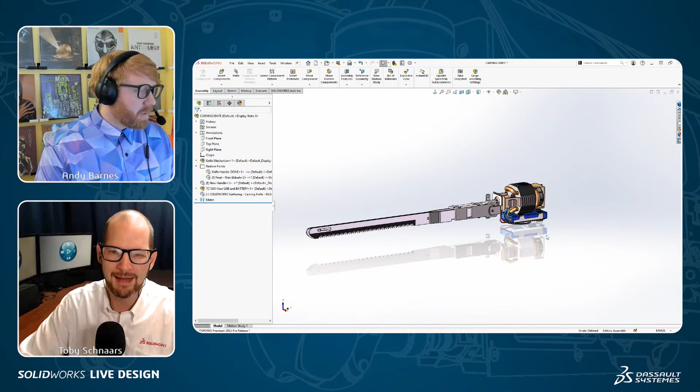So I think this is a perfect time to maybe talk a little bit about how much you love surfacing. And looks like part of this electric carving knife is missing. It is. Yeah. So if you've been watching SolidWorks stuff for a long time, you may remember this was the surfacing demo that we used to show a lot of the time, this handle right here. It's a pretty cool model, but it's kind of dated. And what we wanted to do is actually add a battery to this to have it be a wireless turkey carver. So you can plug it in, USB-C, charges the battery, and now I don't have to have an extension cord to get to my Thanksgiving dinner table.

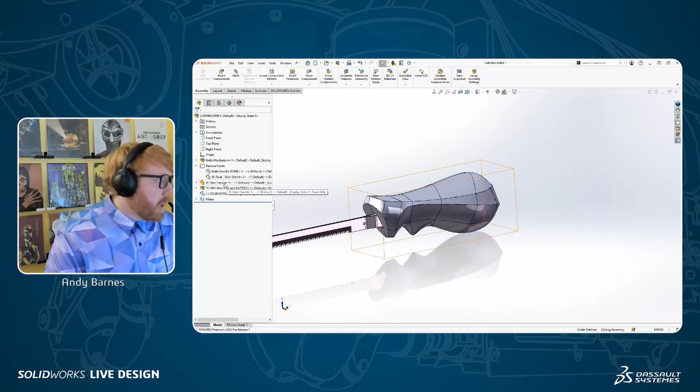So we actually created a new handle, and one of the handles that we created was actually just created right inside of xShape. You've probably seen xShape by now. You can do push, pull, subdivisional modeling, really cool, and then you can bring it back into SolidWorks. xShape is a tool that's available on the 3D Experience platform. It's a browser-based tool. There is a connector to SolidWorks, so you can pass stuff to the platform and bring it back into SolidWorks pretty quickly and easily without having to worry about, did I overwrite my file? There's some basic data management that can happen without you even having to think about it.

Okay, pretty great. So you got your tools in SolidWorks to create your mechanical design, and then if you're a surfacing expert, you could certainly design a handle like that using surfacing. But a different tool would be to almost just have a block of clay that you can push and pull. That's subdivisional modeling, right? Absolutely. Kind of push and pull nodes, push and pull surfaces, and then you can end up with a design like that. If you're pretty good with xShape, how long do you think it would take you to do a handle like that?

I think now that I know exactly how to push and pull everything, you can make that thing in like 10-15 minutes. Oh, wow. But right off the cuff, not having anything, I think it took like an hour or two, trying to just play around. But thinking about how long that would take me to do, I'm a pretty solid surfacing user in SolidWorks. I'd say that would probably take me a day. Let's say it would take me an 8-hour day to really push and pull and get it all to exactly the right shape.

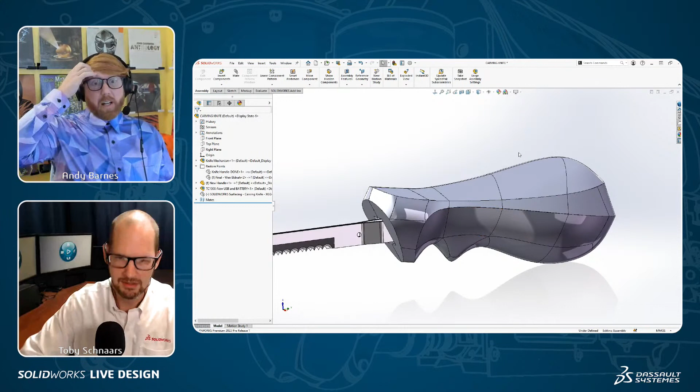And you're saying you're able to bang out iterations. But anyways, we're not here to talk about xShape. That's all good. I did want to point out that if you still want to use traditional surface modeling, you absolutely can. You can use your SolidWorks models, whatever they be, a swoopy surface model or a blocky thing, to put patterns on inside of 3D Pattern Shape Creator, which we'll get into in just a minute, and then bring them back down into SolidWorks.

Is that what you're showing here? This is one you did in SolidWorks? Yep. This is regular old surface modeling, right? Here's a bunch of surfacing features in there, yada yada. I see in the tree you've got solid body 1, so when you were finished, you turned this into a solid. We're ready to go. Exactly. It's a solid body at this point.

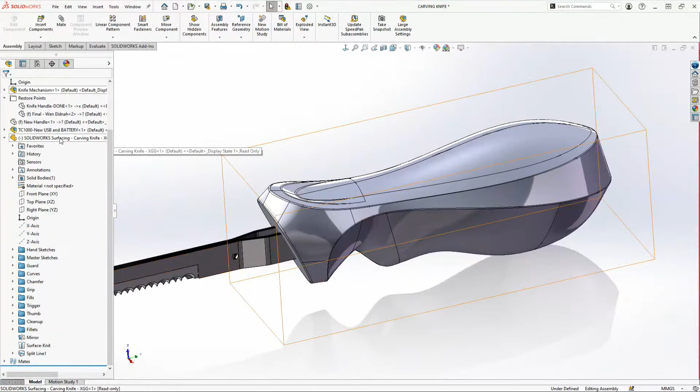So if I go in and look at this part, the only thing I've done to it after I've surfaced it is I've added this split line to the top. So I've cordoned off this area, and this is the area that I want to add a pattern to inside of 3D Pattern Shape Creator. There's a couple different ways to cordon off the areas you want to pattern. You can identify all the areas right inside of SolidWorks, no problem. But there's some other ways to do it too.

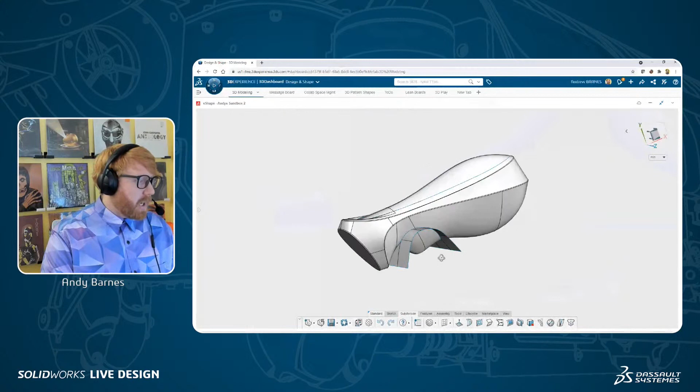So what I'm going to do is hop into the 3DEXPERIENCE platform. I am in a browser right now. I happen to be using Chrome, but you could use any browser. I'm going to open up this part that I've brought into the 3DEXPERIENCE platform from SolidWorks. This is the geometry that came from SolidWorks, and all I've done to it is add some offset surfaces.

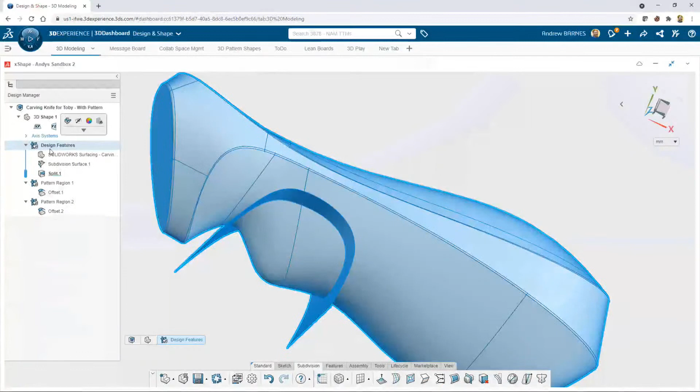If I go back to this geometrical set here, this is actually a SubD body itself. And by the way, I'm in xShape right now. You could use xShape to push and pull around whatever area I want to put a pattern on. Basically that's doing a split line, and now I have just an offset at 0 or a copy surface to identify the areas that I want to pattern.

Make sense? Yep, absolutely. So you're going to put some kind of a grip on there, like a knurl, whatever pattern. Right. So now I'm going to drag it over into xGenerative Design, which is another app on the 3DEXPERIENCE platform. Both of these are completely browser-based apps. So I will hide this area right here, and then start creating a pattern on one of these two surfaces.

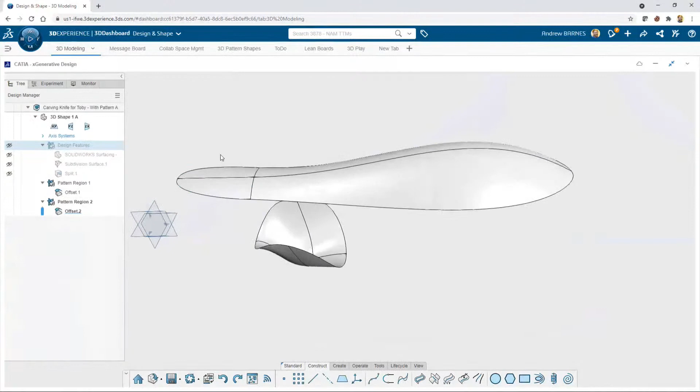The first thing I might want to do is create an intersect with this surface. I'll go to my intersection tool, select this plane, and also select that surface. Now I've got this curve that intersects all of that. Yep, with you so far. Now I could go find my divide curve by length tool, but what I'm actually going to do is pop open the graph. I like working with the graph.

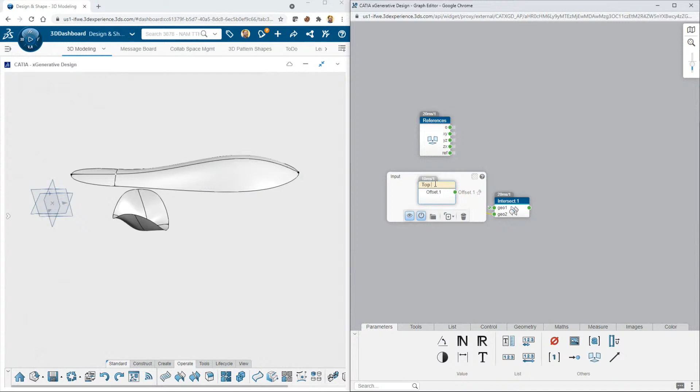This is where things start to look a little bit different than modeling with SolidWorks. Now I have these two nodes that got created. This is an input node, and the first thing I'm going to do is rename it. We'll call it top surface. And there we go, and now that is intersecting with that plane.

I've seen you work this magic before. Just for the sake of our audience members, would it be possible for you to apply a pattern right now so they can see what the end result looks like before you go through and build it up? Because I think that might help them track what you're doing here.

No. Okay. I don't want to do that. All right. Fair enough. I mean, we are on a limited time constraint, so I totally get it. Yeah. I want to build it piece by piece. Just a simple one, just to get an idea of how this is being built, so it doesn't just look like magic, right? Because this isn't just out of the box, like, oh, well, I have this type of pattern and I put a button on it and it just fills up the area, right? There's more to it than that, right?

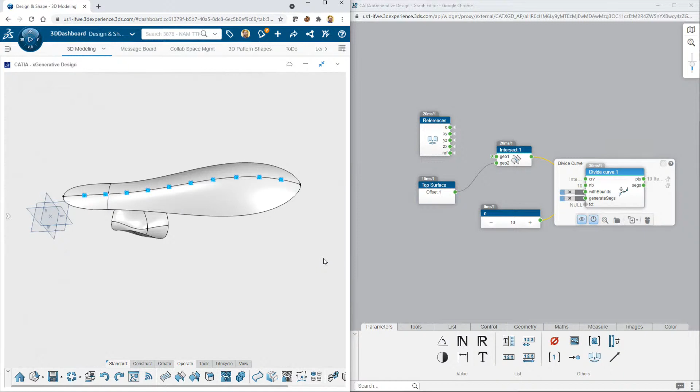So what I want to do is I want to take this curve and divide it into a bunch of points, right? Okay. So I'm going to go divide curve, and now I'm going to add a number to that, and I'm going to say I want to divide the curve by 10 points. Now what I've done is I've taken that curve and I've divided it up equally, right? And we can do this with the segment tool inside of SolidWorks, right? I can segment a line and get a bunch of points along a line. So now I've got that node.

Now what I can do is add a plane, and I'm going to say plane offset point. And I'm going to say at every point, I want a plane that is perpendicular to, and I'm looking over in my graphics area, and I can see those highlight, right? So I know that I want the YZ plane. And now I've got a plane that is parallel to that at every single point. So now I can say I want to divide that one, and I'm sorry. Now I can intersect, right? And I'll just leave that there because I can reuse that in just a minute.

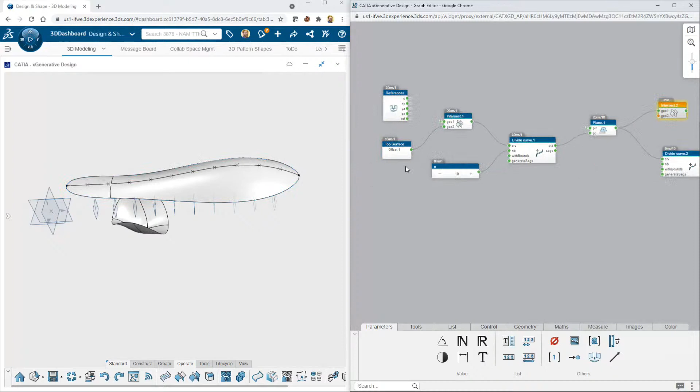And I know I'm going to need to reference this top surface a bunch of times, right? So what I can do is just say I want that to be one of my favorites. And now when I go to favorites, I can find top surface, right? And now rather than dividing this, which doesn't make any sense, I can divide this. So now I've got essentially like a grid of points along there, right? But the problem is I have a number here, like 10, and the distance between these points is much lower than the distance between those points. And what I want to get is an evenly spaced amount.

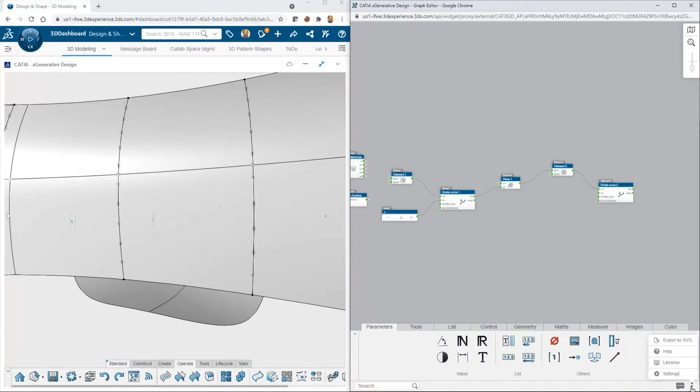So what I could do is set up this thing called a Voronoi and do this weird stuff. But I think what is cooler is, I have to do this stuff all the time, so what I did is I actually created what we call a user operator and saved it inside of one of my libraries, right? So I'm going to open up the patterns library. And now down here in my geometry tab, I have a bunch of different patterns that I've created. And one of them is neighbor distance. So I'm going to pull that out, and all I need to do is give that points. And then what it does is it gives me the distance to the closest neighbor, okay?

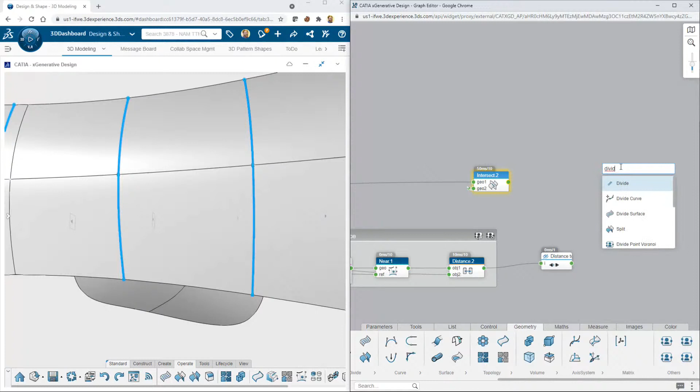And I can always expand that out, and I can see, well, actually, it's all of this stuff in there, but I don't even need to see it, right? I'm just going to reuse all that, so I'll just throw it in there, and now I got the distance to the closest neighbor. Now, the reason that I wanted that is so I could drive a different type of node. I'm going to say divide curve by length. So I've got a bunch of these curves, but I'm going to divide them up by this distance. And this distance to the nearest spacing is going to be approximately the distance between these.

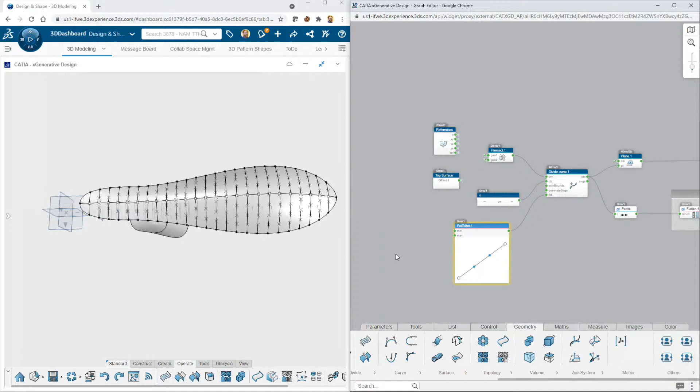So now if I crank this up to, let's say 25, now I've got, it's not exact, but about the same distance between this line and this line and this line, right? So now they're sort of evenly spaced. Now what I could also do is turn this into a function, and we'll add the function editor. Right now, what we have here is a linear relationship: this one is just as far from this one, is just as far from this one. But if I add a function editor, I can actually control the spacing of this with a graph.

So now they're kind of bunched up over at this end, right? Oh, wow. Yeah. So now I can kind of say, okay, down here there's a bunch more, and over here there's less, right? So now I've got a whole bunch of points, right?

And in SolidWorks, half the time when we're trying to create a crazy pattern, it's like, okay, I could create the seed all day, but then how do I tell it all of these other places that I want it to end up, right? And I don't have a ton of control over that, and it might not update necessarily well.

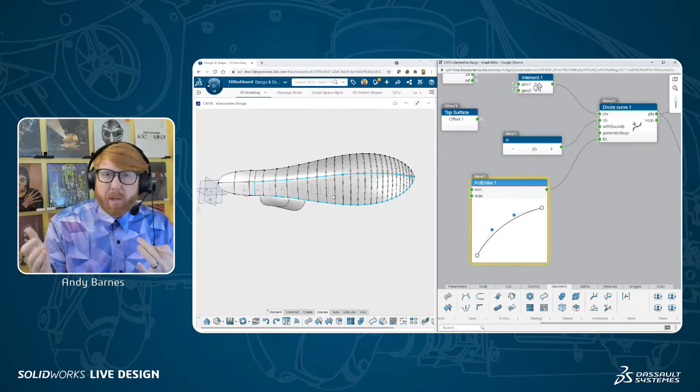You can see in here, we can start playing around with this and get wildly different, kind of gradient swooping differences between instances of the pattern, right? And I can do it very, very quickly and easily. Right? Yeah, that's what I was thinking.

There's been times in the past where I've tried to do something like this on a curved surface, and so I'll end up creating the points to use a point-driven pattern, but then the distance between them, how do you do it? A lot of times I would do a 3D sketch and make a bunch of lines and then make them all equal length, and that would give me kind of equal spacing, but it's very time consuming. You were able just to drop these points in here live for us in less than 10 minutes.

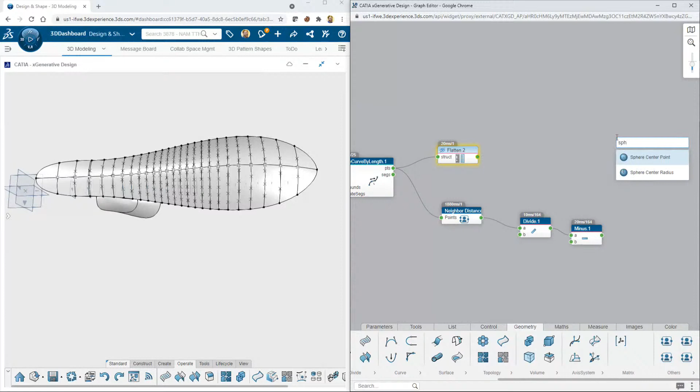Absolutely. And I could even use this for another set right here. I could say divide this by 2, and then I'm going to subtract 0.1 millimeters from it. And now I'm going to use these to create a sphere, center point radius. So now at the center point of all of these, I have a radius that's being driven by the distance to the next one, right? And in no time at all.

And essentially the radius becomes the distance to the closest neighbor divided by 2, subtract 0.1, and now I know that there's a minimum distance to the nearest neighbor of 0.1 millimeters. Right. And then I could use that for a split command, a fill, all that good stuff, right?

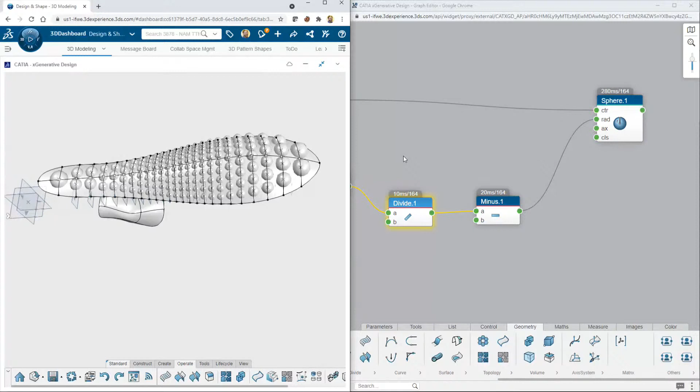So here's an example of how quickly and easily you can create something that is able to update really easily, and the amount of changes that you would have to make inside of SolidWorks to go from that to that, right? It's just mind-boggling. You wouldn't be able to do it, right? Yeah. Wow.

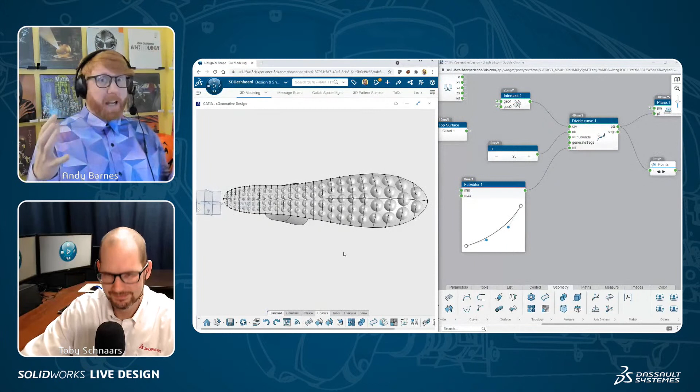And I know there might be some people on the call that are like, okay, that's cool and everything, and it's great that you got a little graph there, but I could do that using equations, right? I could set up some sort of series of equations. I've been on SolidWorks tech support, and I am constantly amazed at some of the stuff that our end users are able to create, just mind-boggling stuff. I had no idea you could go this far. You're way past what I thought the limit was, right?

So I'm sure that there are some users on the channel right now that are like, I could do this with equations. So I wanted to show you something that I don't think you could do with equations. Okay? So I'm going to do another input node, right? And this is how we get geometric stuff into the graph that was created somewhere other than xGenerative Design, right? So in this case, the input is referencing that surface right there. Okay, yeah.

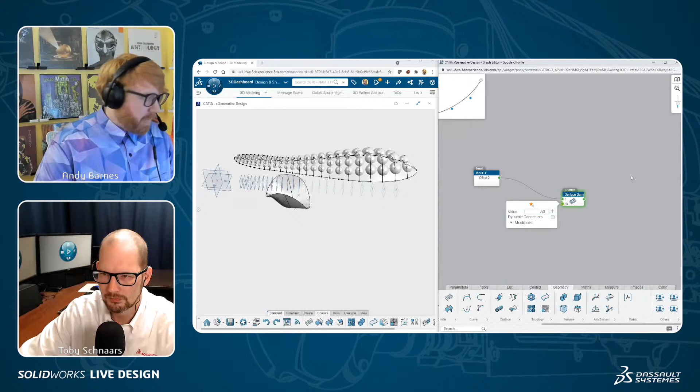Got it. So now I'm going to say surface sampling, and I'm going to just crank this number up to like 50, right? And now it just samples the surface and puts a bunch of points right on the surface, right? Okay. And they're kind of randomly placed, sort of even-ishly placed, right?

And then from that I can create this Voronoi, which we've actually already used, but we haven't really talked about what it does exactly. So it's this special kind of shape in math; if you Google Voronoi and look at the Wikipedia, you'll start to grasp what's going on with it.

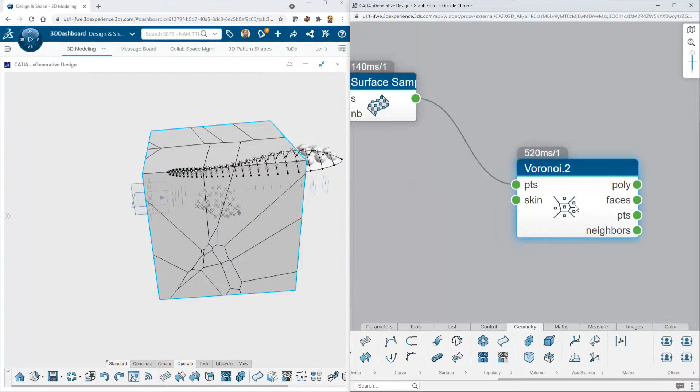But it's basically creating like this, right? Every point is creating not always a hexagon, but a lot of times a hexagonal shape, depending upon where the neighbors are, the neighboring points. So I can actually use this, and I'm going to add a skin here, and then I'm going to say I want to generate faces with that, and then I'm going to hide this, and we can kind of see what has been created here.

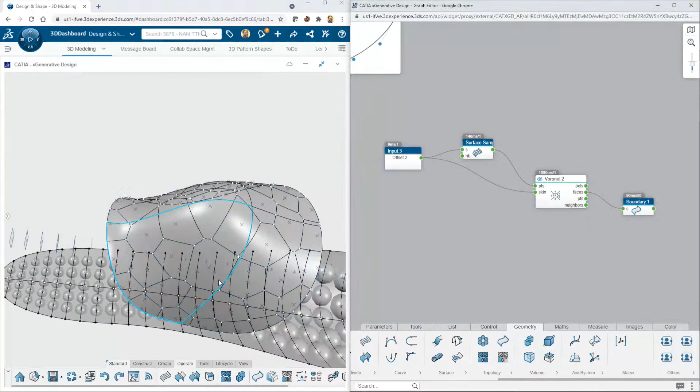If I do a boundary, right? Ooh. I have this kind of crazy hexagonal pattern that was put on there, just by saying drop a bunch of points and add a bunch of hexagons. I mean, they're not all hexagons, but you get the point, right? Like that. If somebody showed me that and said I want to create that in SolidWorks, I'd be like, I don't know how you're gonna do that, right? You could be like, okay, I could get something close to it.

And you start chugging away, but then it's like, okay, actually, I want to make it tighter. I want 100 of them, right? Now, there you go, boom. You got 100 points. Like, wow. You just can't. There's no way that you can do that with SolidWorks, right? So that's what I think really is the power of this. Well, what do you do with that Voronoi now? I mean, it's just split surfaces, right?

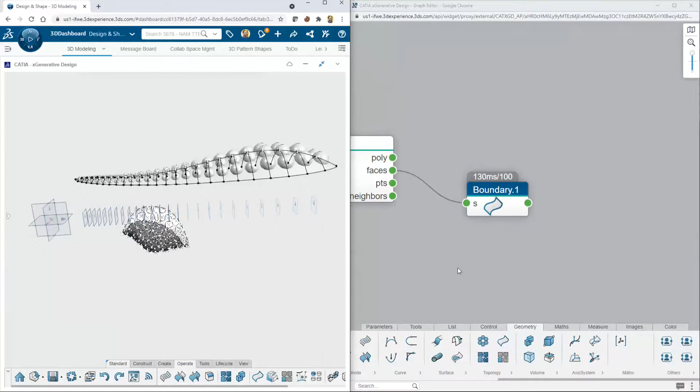Yeah. So what I could do is, and this is a bit more time consuming, so I don't think I'll show it, I'm going to start dropping in some pre-created patterns, like you were mentioning earlier. I think now we have a good understanding of how you might build this stuff. So I just wanted to make sure that it didn't look like magic. Yeah, it's interesting. I mean, it's very different from what we're used to in SolidWorks with that flow chart over on the right.

It almost reminds me of a graphical programming interface, like there's elements of it that I've seen in Blender, or it reminds me when my kids were a little bit younger, we would go through and do programming in Lego using the NXT models. Exactly. And it's like that kind of programmable, logical.

What did you call it before? Computational? Computational design is the industry term for this, and I'm sure that there's a bunch of other terms. It's just the one that I've been told. So you select your input, and then from your input you start establishing all the rules that are going to be applied to that input to generate geometry.

Yes. And some of the really nice things is I can say I want to put all of this in a box, and then I could say I want to organize it all, and it'll automatically space everything out properly for me. It's really nice and organizational. And then I can do things like hide the entirety of it. And then I could even say, okay, I want to create a user operator from this, and that's how I could take that chunk and say I want to use this over and over again, right?

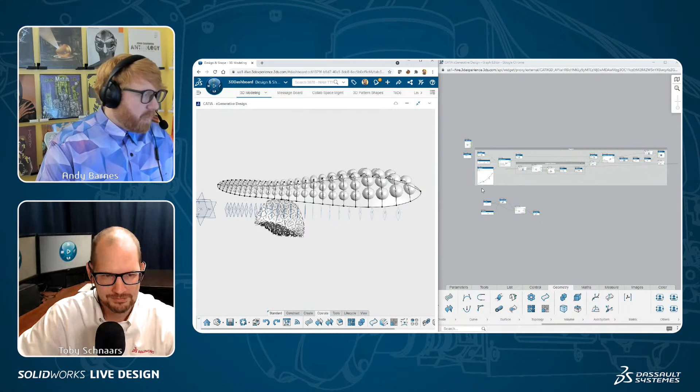Right. Cool. Yeah, if your company gets almost like a signature texture, then you might want to start using that over and over again on different products. And how do you do that? Right. Cool. So I think it would be good to show some of the other types of patterns that I can get on here really quickly. So I'm going to go ahead and just ditch all of those real quick. I shouldn't have got rid of my inputs, but that's okay.

One of the other things that you can do is, if you want to share this with somebody, you can literally just take that whole graph and share it out as a text file, like a TXT. You can copy paste it right inside of an email. I wouldn't suggest it, but you totally can. It works. It does look like a ton of gibberish, but you can do it.

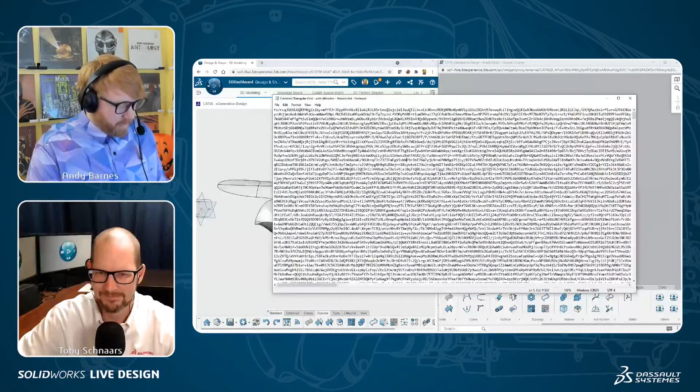So I actually have a whole bunch of stuff. For instance, I think this is pretty cool: centered triangular grid with attractor. So I'm actually just gonna open this up. You can see it looks like gibberish, right? Control A, Control C, and then I will just click inside of my graph area, and now it's gonna paste that entire graph inside of there.

And then I just need some inputs. Right, so I just need to give it the main surface and the triangle size. So I'll say that's my main surface, and now it's going to build this. It's creating like a bounding box. It's grabbing the surface area of the bounding box. It's figuring out what the longest portion of it is and using that to be like the direction that it creates this triangular grid in.

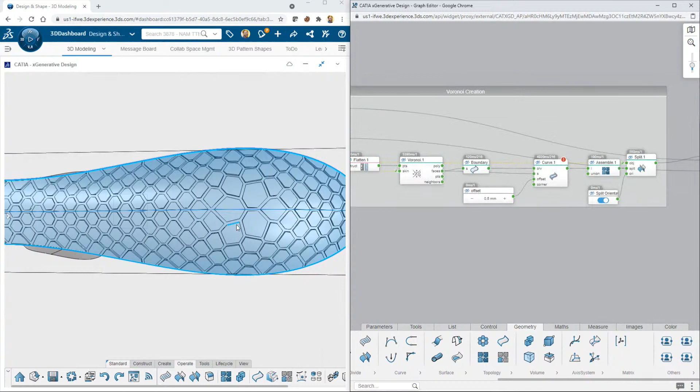It's doing a bunch of math to center the triangular grid on the center point, right? And now finally it's actually creating this attractor point, and then from that attractor point kind of moving the triangular grid, bulging it out in a certain direction, and then I'm offsetting all of the faces, right? There's basically a face offset, a curve offset on every single face, and then I am, not extruding, but thickening that surface, right? Normal to the other surface, up by a certain amount. Pretty wild stuff.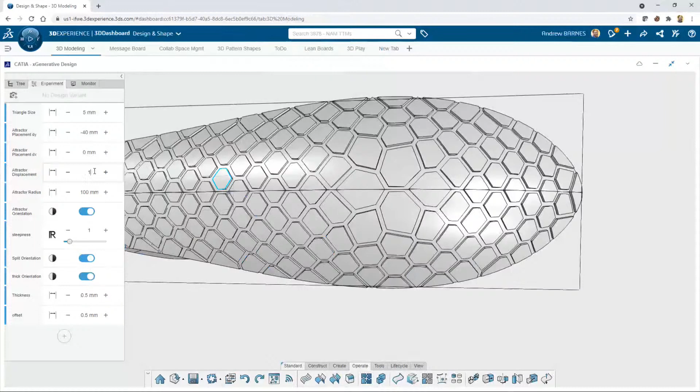So now I can even put controllers on here, right? So for instance, maybe there's somebody who doesn't know how to set all this up, but they want to be able to play around with it. Well, I could say the attractor displacement is larger and the attractor radius is smaller, and actually get this shape to update. So I'll say the attractor displacement is 7. So at its largest point, it's going to displace the point by 7 millimeters, and at its smallest point, by like 0.1 or 0.01 millimeters. And that radius is how far away that change happens.

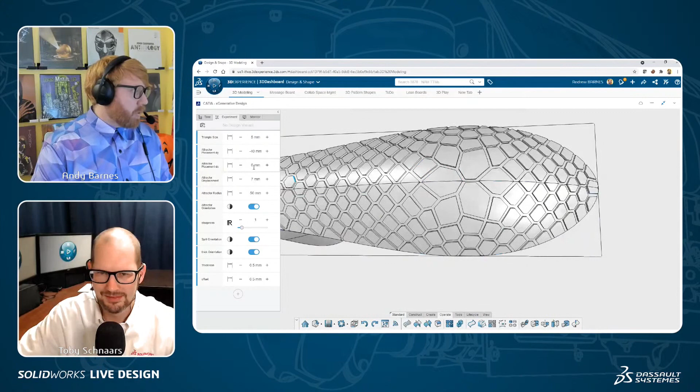So now I've made it small. I've made it push more, but for a smaller area, right? So this is actually a different output than I would have gotten before. And this attractor displacement in the Y direction shows where this attractor would be. Well, what if I displace it by 10 millimeters in the X direction? Now I'm going to get an attractor that's offset, it's going to go this way, whatever positive X is.

Oh, wow. Okay, I see what you're saying. It's no longer necessarily going to be symmetric. Right. It's going to be offset. Wow. Yeah, this is amazing. I mean, the chat's going crazy. PC says, beautiful, man. Oh, wow. Yeah, look at that result.

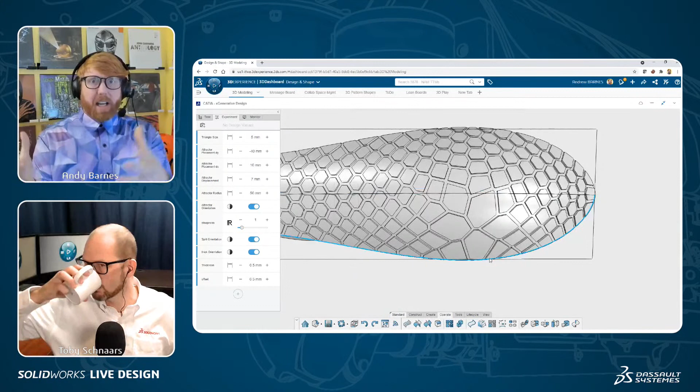So the point of showing this part is that maybe you're not the person who's the final decider for what this pattern is going to look like, right? But you could build this and then somebody else could literally just play around with it. Like I can even flip the split orientation. Right now I'm extruding all of the inners, but if I flip it, then I can extrude all the outers. I must have an error somewhere, but that's okay.

And you will get errors, and the other great thing about errors is if I have 200 instances of something and I'm trying to do a cut or a combine, SolidWorks is going to say it errored. There's a general geometry problem. It's like, what does that mean? And I have to start going, okay, where are all the places where it may have failed? The great thing here is you literally get a list output, and you'll have one that errors out. You can find those errors and go look at a specific point.

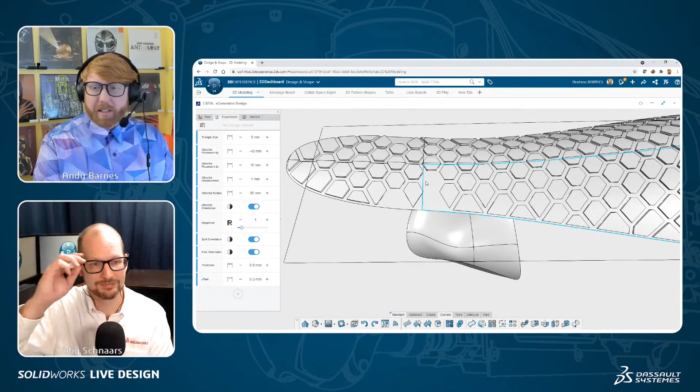And a lot of the stuff that ends up failing on this one is actually because Jordan Tadich created this surfacing model. So I'll blame him. But this face should be curvature continuous right here, and it's not. So because of that, when you try to do an offset line at a diagonal across this, it's not tangent anymore, and then things start failing.

So yeah, really, if that was SolidWorks, the whole thing would just fail. You just wouldn't have a pattern. You wouldn't know that. Right. There would be no pattern. Awesome. Yeah, because even let's just say you were like, look, I don't know how to fix it in all these rules. These rules are confusing.

You could put that back into SolidWorks, and then you could just fix those instances in SolidWorks or do whatever you do. You can keep on moving. And a lot of times in here we go like, okay, I know the edge cases are going to error out, and that's fine. They're just the edge cases, and that's not even important to me. And you can just move along with a thing that has an error in it, right? And it's pretty sweet for that reason.

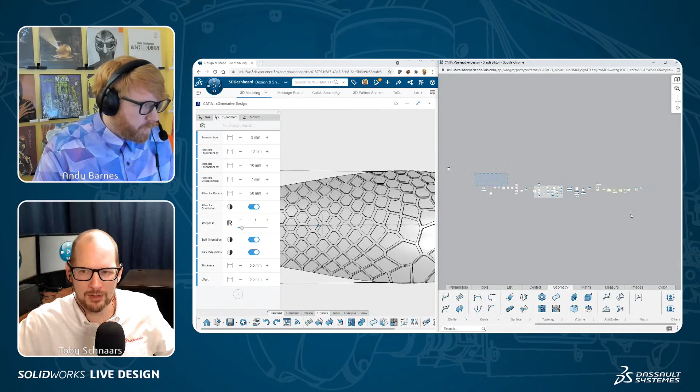So let me show you another one here. And it's just so amazing because at your company you could just have this library, like these are the different textures we use on different products, and whoever the wizard is, Andrew Barnes, you're the wizard. I'm the wizard. You go in and set up this library and then make everybody else at the company look great, because all they would need to do is grab lumpy diamond gradients and just add that back onto the model. It might be my favorite name for something that I've ever come up with.

Let's see. It also makes me think of lumpy gravy, which I like. Okay. Yeah. This is a Zappa reference. Yeah. Anyways, it's like, oh, he likes to eat lumpy gravy. That's kind of weird.

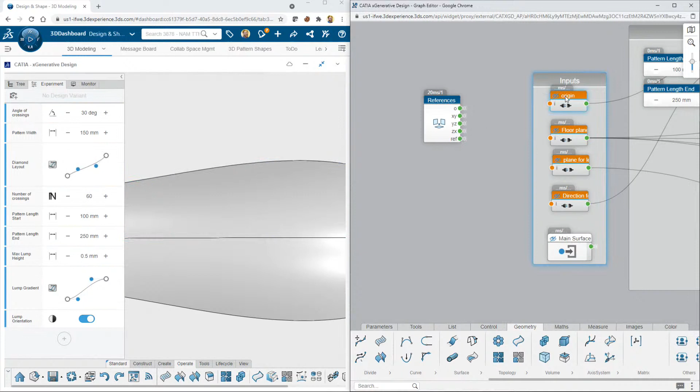So you notice I have a whole bunch of different experiment controllers now. And basically I have a bunch of different inputs, right? This one's the origin. And then it's like, okay, what's your floor plane? My floor plane is going to be the ZX plane, plane for lengthwise intersection. That's going to be my XY plane. And then the direction for the line is going to be this one. And so I know it is, wait, no, I don't know what it is. It's my YZ plane. And then I need to input my main surface, which is this one.

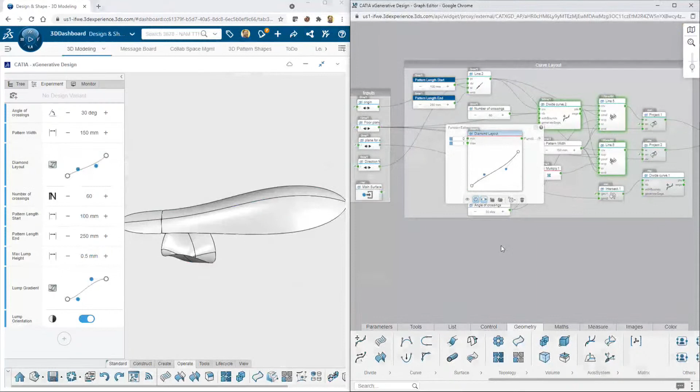And now it should build. Is it building though? Sometimes I just need to suppress and unsuppress something. Activate and deactivate something, which is actually how you get a rebuild essentially. Okay. Yeah, it's interesting. We're seeing the progress bar up there, but I'm not seeing any errors later in the logic tree on this one. Right. Maybe this didn't. Oh, that's all it did. It didn't actually take the input. I thought it did, but it didn't. That's all it was. Yep. Okay. There we go. That's what we're expecting to see.

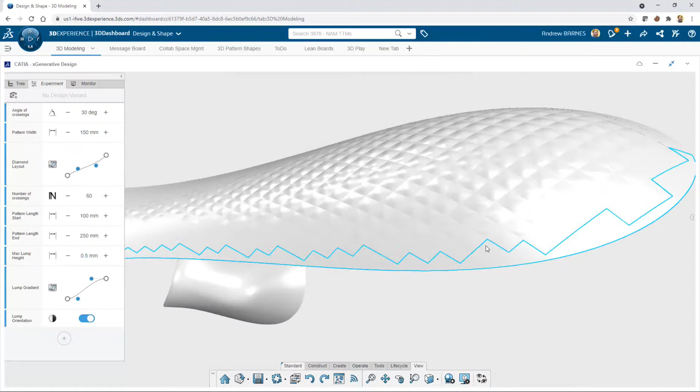There's a point in the middle of all these diamonds, and I'm basically doing a fill surface, a fill where the boundary is the diamond, and then there's a point, right? And closer to the edge, that point is basically on the surface, so it's like a flat piece. And then the farther away it gets, the closer it's going to be to my maximum lump height. So my max lump height right here is 0.5.

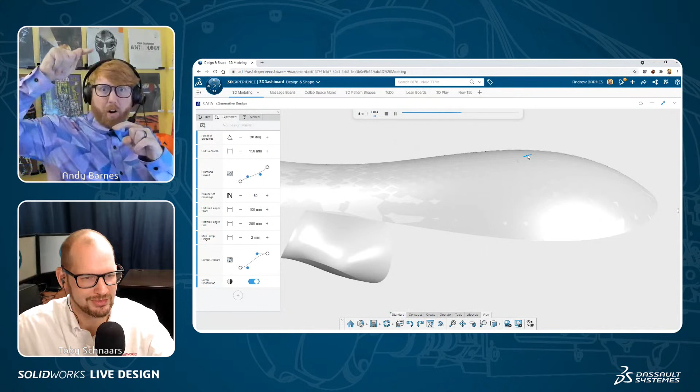What happens if I try and bump that up to 2 millimeters? And now it'll, if it builds, right? Sometimes this one will fail because if you get that point far enough away, just like you would in SolidWorks, then your fill surface fails. So it can be a gamble, but when it works, it's kind of fun. Yeah, woo! Porcupine grip, right?

Now it's just saying the biggest one is going to be 2 and the lowest one is 0, and then this actually plays with the gradient itself. So right now it's kind of pulled out, it's going towards 0, right? But if I did this, now it's going to be much sharper on this end, and it won't actually get down to 0, right? Okay.

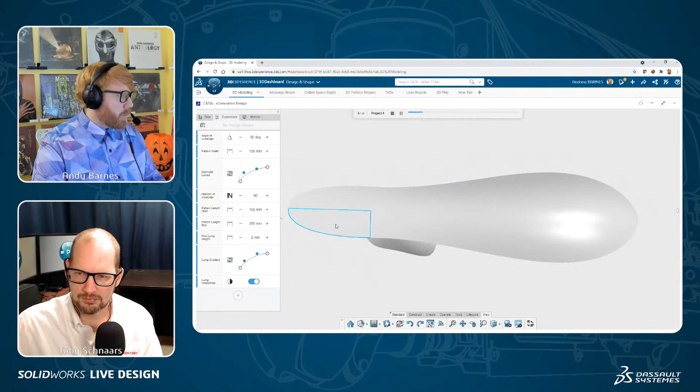And then this one is actually changing the layout of the diamonds. So if I were to do something like this, then we'll probably see smaller diamonds at one end and larger diamonds at the other end. And this is where things really start to fail, because then I'm trying to do this massive diamond on one end that doesn't work, right.

And then it's trying to go up at a certain distance and it doesn't. But we'll see if it works just for fun. Right, but the point is that if there was all of a sudden an uptick across the country in the number of accidents that occur over Thanksgiving due to slippage of an electric turkey carver, this could be the conversations you and your team have. Like, what could we do to prevent those accidents? Yeah. Maybe if we added more grip to the handle of the electric turkey carver. Maybe if we made the diamonds a little sharper.

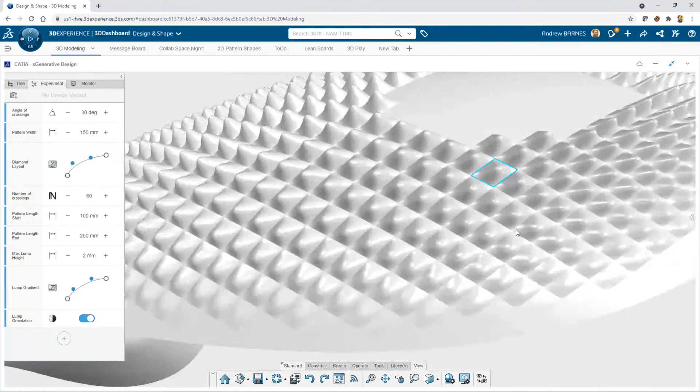And then in this case, what's happening in the middle there? Is that instances that are erroring? That's instances that errored out, which is expected to a certain extent when you start just grabbing stuff and going wild with it. Yeah. But I would be willing to bet that if I put that back down to a more manageable number, like 1 millimeter or 0.5 millimeters, those would probably all build just fine. Okay. Right? So wow. I did have one more that I wanted to show.

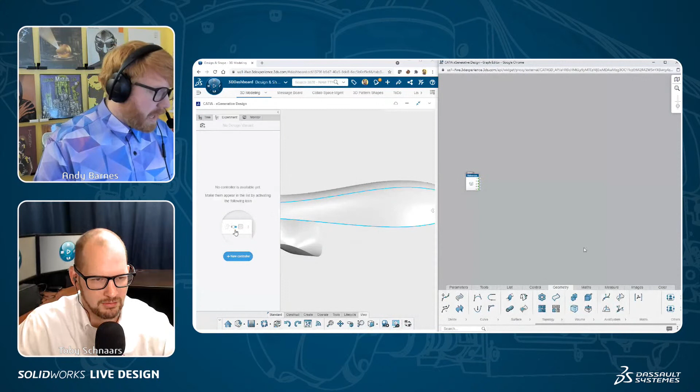This is pretty incredible, Andy. I could imagine this being such a valuable tool. And in the end, is it difficult to take this geometry and get it back into SolidWorks? No, and I'll show you that in just a second, actually. Oh, okay, great. Yeah, totally. So this is the last one I want to show.

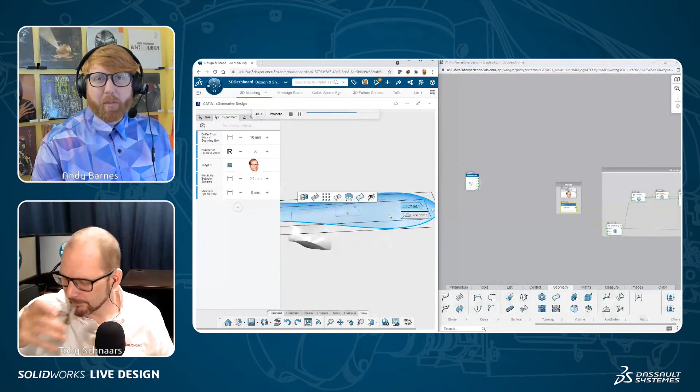Steve says he wants to start having turkeys at the user group meetings instead of pizza. I agree. Actually, that would be great. Can we talk real about turkey for a minute? Let's go. The thing about turkey is it's kind of dry, it really isn't great unless you have a ton of gravy on it, right? Regular gravy or lumpy gravy? Lumpy gravy. What's your feelings on cranberry sauce, man? Very polarized topping in the world of the Thanksgiving dinner table, for sure. Some people love it. Some people think it tastes like chemical. I probably land in that latter category. Although as I get older, I've branched out. I've sampled different varieties, and I'm starting to understand what the appeal is. So there you go, Toby.

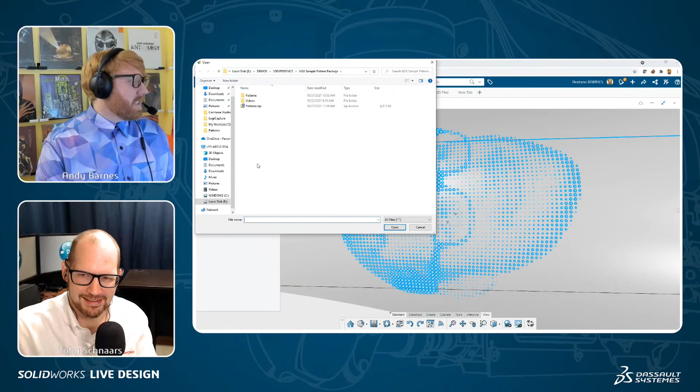Man, if I saw a turkey carver with that pattern on it in a store, I'd buy up the whole lot. That's a winner right there. So it's fun to have Toby's face, but we can totally swap this out with, you could do a company logo, right? What this is doing is it's grabbing an image, dividing the image, slicing it up into pixels, and then it's saying the average color of this pixel is some gradient between black and white, right?

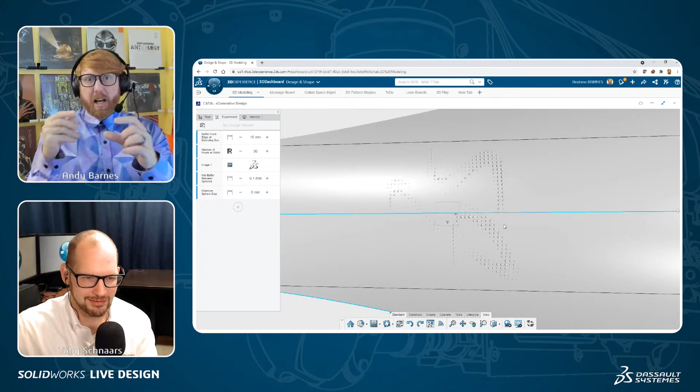Oh, that's the way you have this set up. I thought you had X, Y positions for each of those points, but it's automatically determining the location of those points based on the image gradient. On the image, yeah, that's amazing. So I'm doing some math to say, okay, we're gonna place the image here, we're gonna scale it to this size, we're gonna slice it up by this much to give this many pixels, and then it's taking the average color of each pixel and determining the size of the sphere dependent upon the color of the pixel. And you can drive that too. This happens to be black and white, but doesn't have to be.

The other cool thing about this is if you're an artist and you want to get this cool pattern or shape, you can literally go into a sketch tool, or even just a marker and a picture. Draw something on a piece of paper, take a picture, put it in here, and you can have that thing that you drew with your hand represented by a really cool pattern on your shape that has this nice cool gradient. I just think that's amazing.

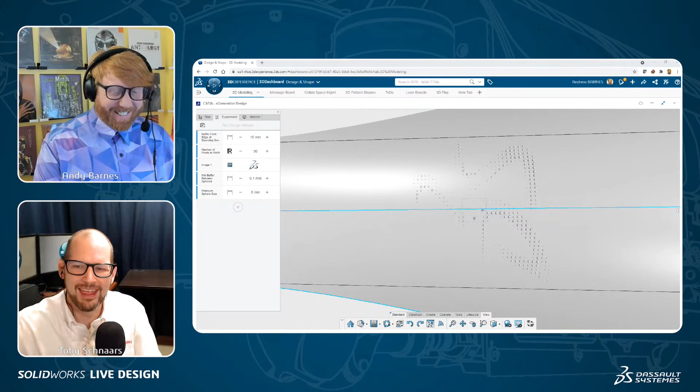Oh wow. Yeah, I didn't even think about it. So you could, man, I'm just brainstorming here, you could manufacture something that could be hung on a wall or presented. Wow, yeah. You're blowing my mind a little bit here. And then you could do it with holes. Could you use holes as part of the pattern?

Absolutely. Yeah. So actually, here we'll hop in here real quick. This is one of my mind blowers. Whoa. This actually came from XGG, brought back into SolidWorks. The image put on a bunch of sheet metal parts, and this actually works. I wouldn't say it goes lightning quick, but there are 40,000 holes in this SolidWorks part. Wow. 40,000. I mean, there's no way that you do that with traditional SolidWorks, right?

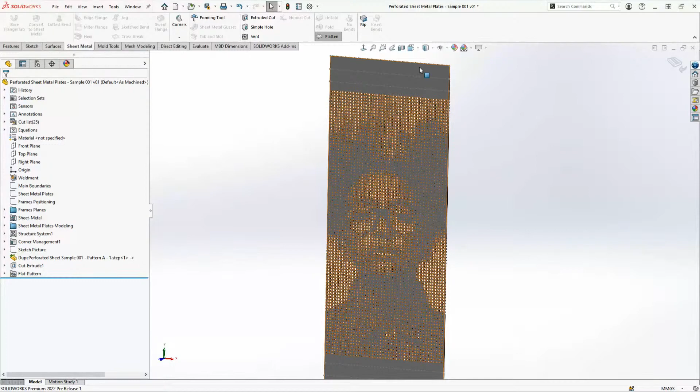And right there, boom, I got a flat pattern that I can save to a DXF, send it directly to my laser cutter, right? We're done. Right? Sick. So yeah, I think that is a really cool use case for it. And if you look around, a lot of buildings are actually using those for building facades. They'll have some sort of graphic on sheet metal. It's basically just a bunch of sheet metal holes, and they're generating that using a tool like X Generative Design.

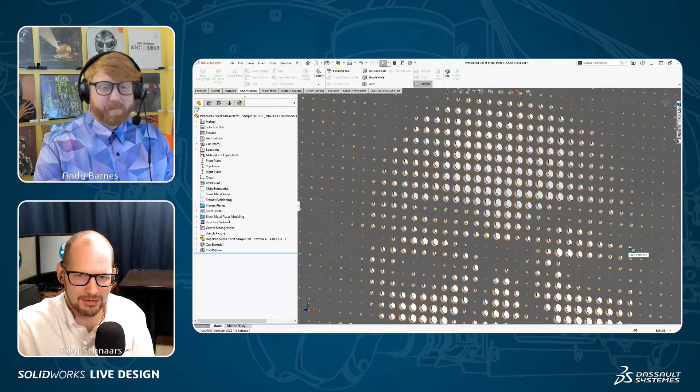So how would you do that if you were using parametric modeling? You wouldn't, right? You could. Yeah, you would just have to bring in the image and then sketch all those points. But then each hole size would be uniform. You'd have to also come up with a solution to make the holes different sizes. Yeah, absolutely. Wow.

So the other thing that we talked about. You're blowing my mind here, Andy. You're completely blowing my mind.

The other thing is, how do I get that back into SolidWorks? Oh, right. Sure. So what we've done here is you can use the connector, or you can export as a step file. I just want to show a couple different options, but this one is literally just an exported step file. So this one, you wouldn't even use the connector. I exported the step file. Step file can bring in things like sketch geometry. So I didn't even have to build solid geometry. I just created a bunch of circular sketches, and then brought that whole big sketch in and said, cut extrude. So you can do that.

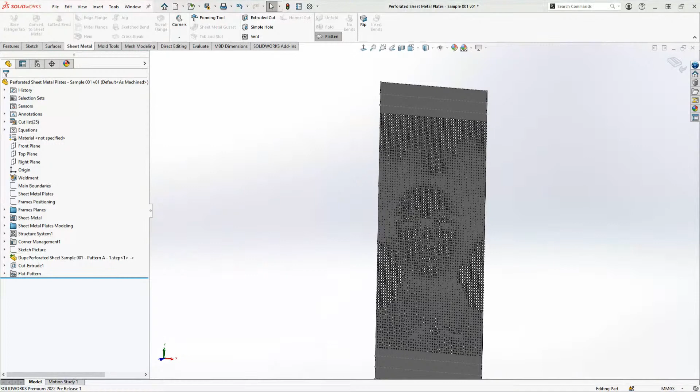And then the other thing that you can do is you can bring in the surface geometry. I don't have the example here. It's actually in a different file, and I screwed up and opened the wrong one. But you can bring in solid geometry. It recognizes the solid geometry. You can do a combine feature, and boom, you got a solid body. Combine the pattern that I created here, like those Voronoi pads, and I just combine it with my original, and we're good.

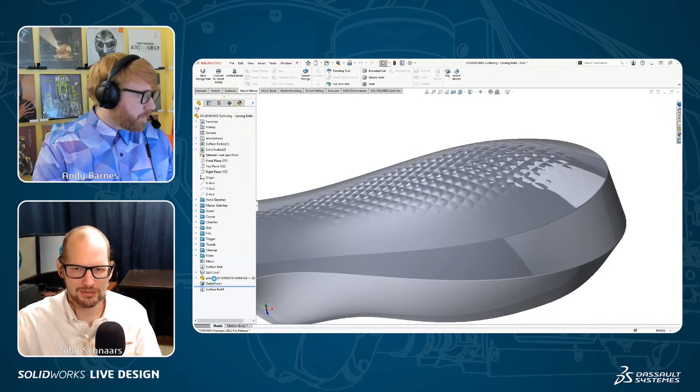The other thing that you can do is if you created a surface. Now, do you think I could thicken that surface? Probably not, right? No way. You know how curvature continuity works, and it's just not happening. But I can just bring that surface body right back in, and all I've done is a delete face. I just deleted out the split line, so the top face is gone now. The original one that I had in SolidWorks, gone. This is my imported geometry that I brought in from XGG, which comes in as a NURB surface.

It's not coming in as tessellated geometry. You will find some other similar products to XGG that are doing a translation. What you're looking at is tessellated STL type geometry. And when you bring it into SolidWorks, it's doing a translation of that, and you inevitably end up with a bunch of gaps and things like that. If you were using a different solution, you're saying. Exactly. Gesundheit.

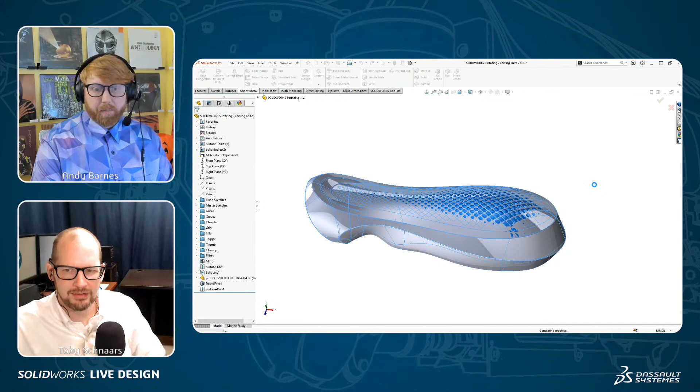But if you bring this in, it's NURB surfaces. It's BREP geometry. It's already the stuff that you're using in SolidWorks. So I can literally just do a knit, and my knit surface command just works. I just throw in those surfaces, create solid, done. Oh, wow. Now you're back in SolidWorks as an actual solid. So it's not just for rendering. You could use this to design tooling around this, for example. Exactly. Tooling. I can create a drawing with this on it, all of that good stuff.

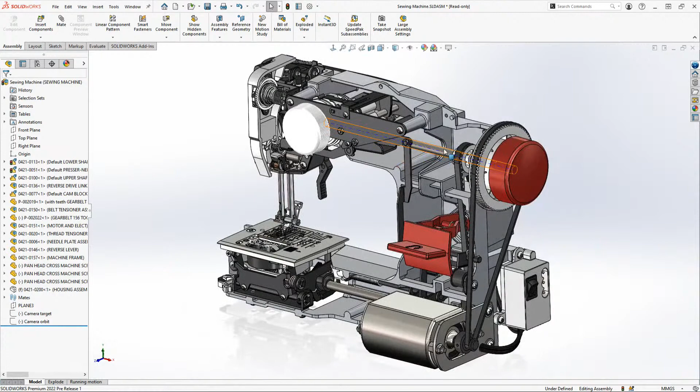But man, this model's pretty interesting. I haven't seen this one before. So this is actually a sewing machine, and this was created by Mark Schneider here at SolidWorks. If you've been following SolidWorks for a while, you've probably heard Mark Schneider, right? You've probably heard his voice, probably seen him in Model Mania. He's telling you how the model was built, right? He's the man. He created this model from scratch.

And what's wild about it is I can take this and start rotating it. Everything moves. Look at all the little cams everywhere. This really is a testament to how far we've come with assemblies and mates and stuff, right? It's just absolutely wild. It blows my mind. I can just rotate this one rod and everything else moves exactly how it does in a sewing machine.

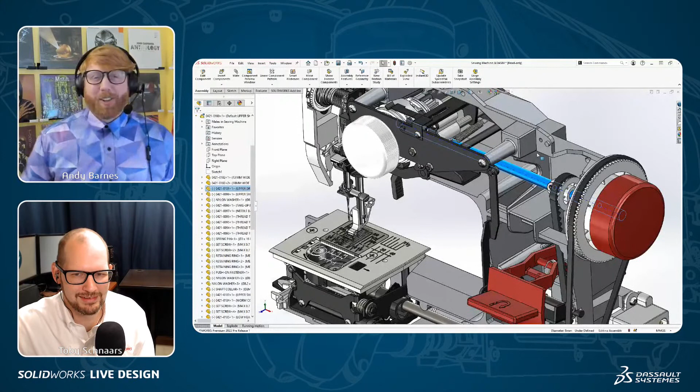I've watched GIFs of it in random places on the internet, and I still have no idea what's going on when the sewing machine goes down. I would shove a piece of fabric through there and it sews it together. I don't know how it happens, but there's a lot going on in the background.

Now, absolute SolidWorks modeling beast. That's who Mark Schneider is. But surfacing isn't really his end all be all game, right? Okay. But I like where this is going. Yeah, so we got a case that goes around it. It's cool, whatever. It's a sewing machine, right? So what we tried to do is, hold on a second.

I just want to tell you something. Eric in the chat said Mark Schneider's model is so amazing. It really is. He wrote it S-E-W. Oh, it's sew amazing. Pretty clever. Huge shout out to Eric. You win for pun of the day on that one. All right, it's all good.

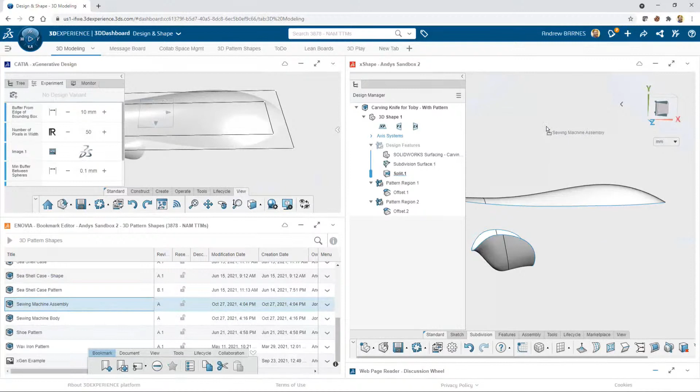That was perfect. So I'm gonna hop back into the platform, and what we're gonna do real quick is take a look at this other thing. So if I show the assembly here, I'm gonna open this up. Won't save that. I think it's pretty cool how you're able to so quickly bounce from SolidWorks to 3DEXPERIENCE to take advantage of some of these tools. There's so much beyond what we can do in SolidWorks, and being able to quickly leverage that geometry and those tools is so amazing.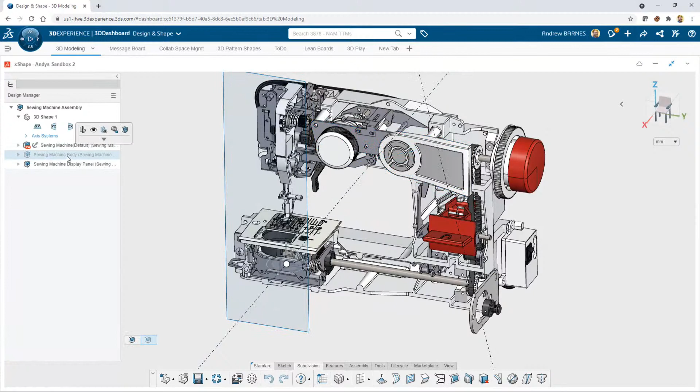Yeah. So here's my sewing machine. The whole thing was able to be brought in with a connector, right? And now it's all geometry that I can actually utilize. I could start a sketch on this face if I wanted to. And what Jordan Tadich helped me with was he created an xShape design here, which looks a little bit cooler. He created it in a couple hours. It could be better, but it's still pretty cool, you know?

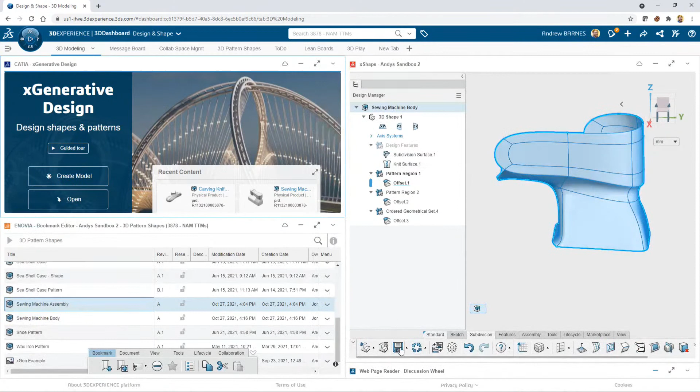And what I did is I opened this up and created some areas that I wanted to add a pattern to, right? And we're going to say 11:52 here. What kind of patterns can I add to this thing in this amount of time? So I'm going to hide this. I've got basically three areas, this region, this region, this region. Then I'll save this real quick so the bodies show up hidden the way I want them to, and open it back up in xGenerative Design.

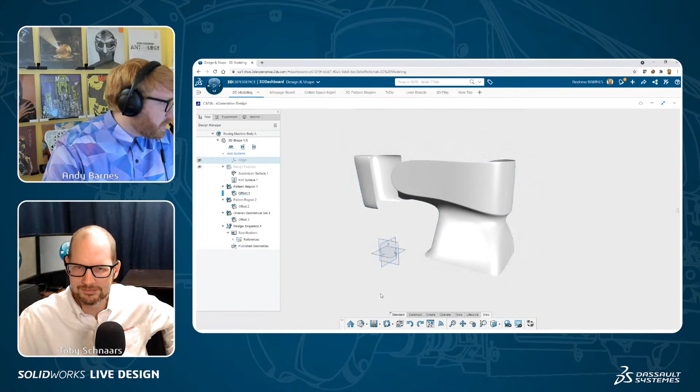And I created another user operator, which you may have noticed, which is my lumpy gradient. My lumpy gradient model is basically built for one surface. But what happens if I want the pattern to go around a loop? Right now it's a diamond pattern. It's got to meet up with itself on the other side, so it becomes pretty tricky. So the first thing I'll actually do is create this. I can go to construct and create a point. And actually I want to change the view to be not perspective.

Just so I can visualize this thing a little bit better. The default in xGenerative Design is perspective. And what I like is the fact that I can just drag stuff around on a screen, right? And just go like, okay, that looks about where it's supposed to be, right?

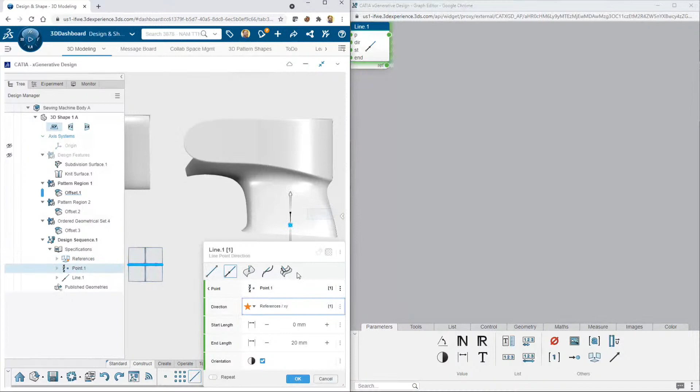And now with that point selected, I can create a line and I want to say point and direction. And now it's referencing that point, but I can say, no, I want it to reference that point. And then I can take this line and move it up here and say, I want it to go to about right there. Okay. And now I've got this line, right?

And like you can see, I did that all in the graphics area, right? So one of the things I wanted to also point out is that you can do a lot of stuff in the graph, but you can also do a lot of stuff in the graphics area, right? So now it's actually created nodes for that. And then what I'm going to do is come down and add in my patterns library. And then over here, I've got looped, lumpy, diamond, gradient.

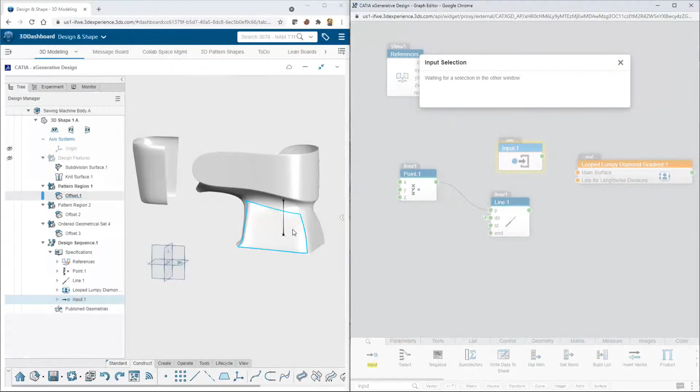You can actually add pictures for that too, which is nice. Like create your own little icon. I need to do that. I haven't done it yet. So I'll say I want to grab this as my input surface. And here's my line. So now I just got main surface, line for lengthwise divisions.

And then if I made the line the right size, then this thing should just build in a relatively short period of time, considering all that it's doing, right? I mean, it's doing some nonsensical stuff in the background, right? Yeah, I mean, it's just amazing to be able to have these, like I said before, as part of a library. It's incredible that you're able to generate those types of results.

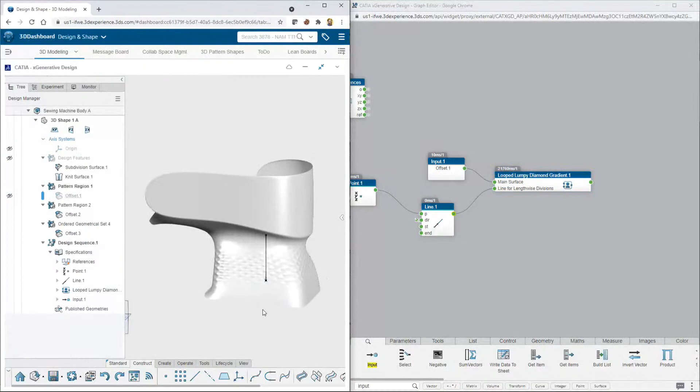Wow, look at that. Just from essentially dragging and dropping and just using and reusing a library. That looks amazing. I mean, again, imagine trying to do that in SolidWorks. And it does meet up, you said? Like there's not a seam? Right, there's no seam. It goes all the way around.

And basically what I did is I took a grid of points. Imagine you have a rectangular grid and I say grab the first one here and then the second one from this grid and then the third one and the fourth one and the fifth one, right? Now you take that grid, wrap it all the way around a cylinder, right? And now essentially you got a bunch of spirals. And then I just did the opposite direction. Now I've got a bunch of spirals in the opposite direction, right?

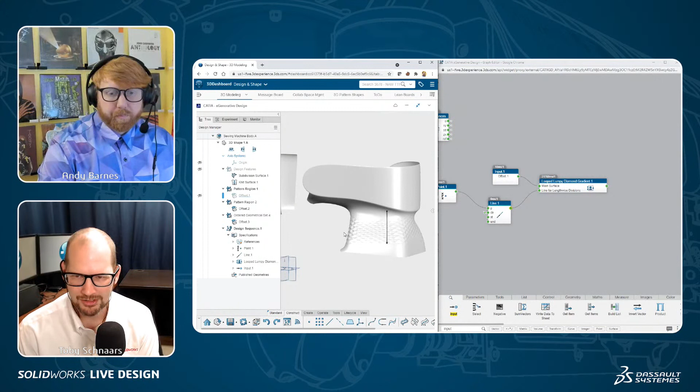So then from that, I can basically slice the surface, right? Almost like a split face, to slice it up into a bunch of different diamond-shaped faces. Yeah, and that idea of having that blend, I'm sure everybody on the call right now is imagining, how would I even do that in SolidWorks? Have them start out not as deep and then gradually get deeper and wider and larger. And then, of course, having the pattern all meet up with itself at the end.

It's incredible, Andy. Well done. Well done. Thank you. Thank you.

And just so we can see what's going on in there, if I click edit user operator, there's all my nodes, right? Okay. Now you can see this spiral pattern that goes around, and all the individual points. I mean, even just saying grab the geometric center of this face. Like, what? Yeah. How would you even do that, right? So yeah, that's kind of what's going on.

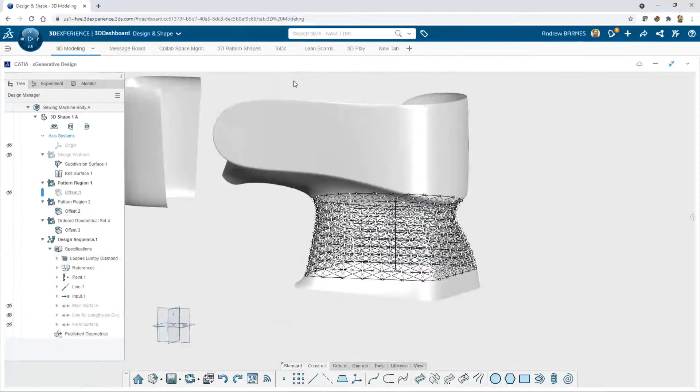And I did also want to show this real quick. I have just some other examples of things. Is this not going to? I think it should update. It's probably because I have the high quality graphics. Yep. Just some other stuff that I've created to show you, here's some other stuff that's not just a pattern, but things that I have built from scratch.

Like this is an actual weave. Oh wow. Right? And then it's on this xShape basket. So you can actually go into xShape, move your model, and you can do this with SolidWorks too, right? You can move the surfaces in SolidWorks and that's going to update.

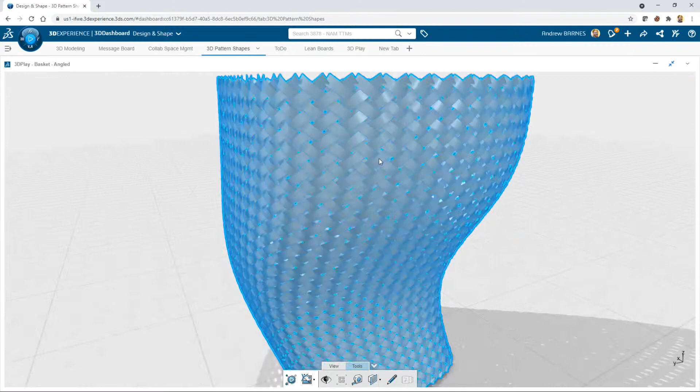And then you can grab the individual, you can measure the individual length of all of those, right? And know exactly how much material and exactly what length each one should be ahead of time, right? This one's kind of like, I think it's supposed to be like a makeup case or something.

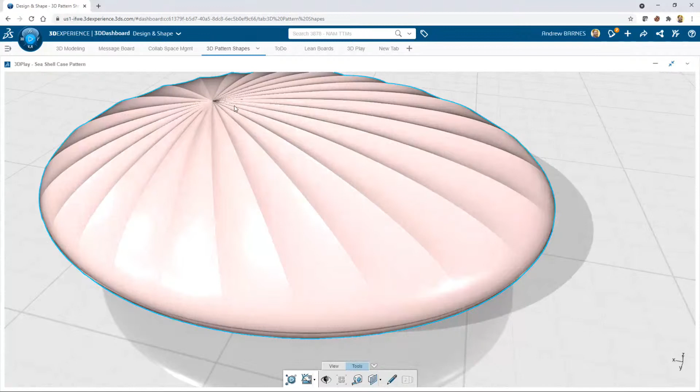But this is actually created from scratch in xGenerative Design, right? Well, it's actually built on an xShape model, but then all of these surfaces are basically built out of, okay, here's the point, and then I'm going to divide all these up, right? I put a bunch of points around the edge, divide curve, add lines to these points to divvy it up into surfaces, and then there's actually another curve that represents how deep this dip gets in here. So you can move this point around, you can modify how deep that dip gets, right?

And each one of these is individually different. So that's the challenge: could you create one of these in SolidWorks? Yeah, super simple, totally easy, right? Could you create all of them in SolidWorks? Yeah, you could, but they're all different, right? There's no way to pattern that. They're all different. Right, and on top of that, if this is the company you work for, you have many different size makeup cases as well. Right. Yeah. So now you have the opportunity to just slap that on there.